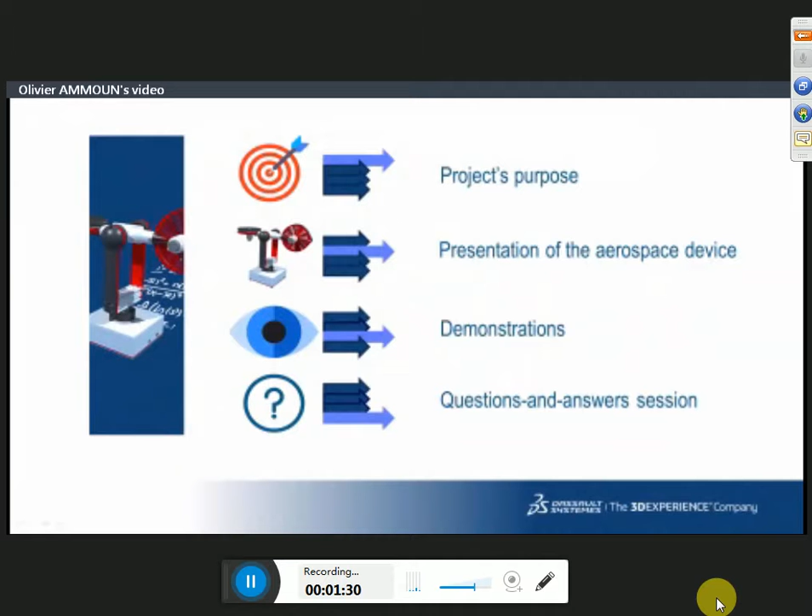So what exactly is this collaboration? The two companies wanted to collaborate in order to enrich the pedagogical experience initially developed by Quanser, the educative aerospace device, also called Quanser Aero. The aim was to use the Dassault Systèmes 3DEXPERIENCE platform to create a virtual twin of the real device, a kind of virtual helicopter whose behavior will be identical or almost identical to the real aerospace device.

So what we did is that we created a 3D model of the aerospace device, but it's not simply a 3D model. We implemented multiphysics behavior to the 3D structure, which allows it to move and behave exactly like the real aerospace device. We are able to control the virtual twin almost exactly like the real device. For example, we can give a target angle for the pitch and the yaw axis of the virtual helicopter, and we will see how the virtual twin will dynamically try to reach the position.

At any time, we can connect the real device to the 3DEXPERIENCE platform and see that the behavior of the real device is really similar to the one predicted by the virtual twin. So what exactly was the purpose of the collaboration? Well, the main goal was to extend the utilization of the real device.

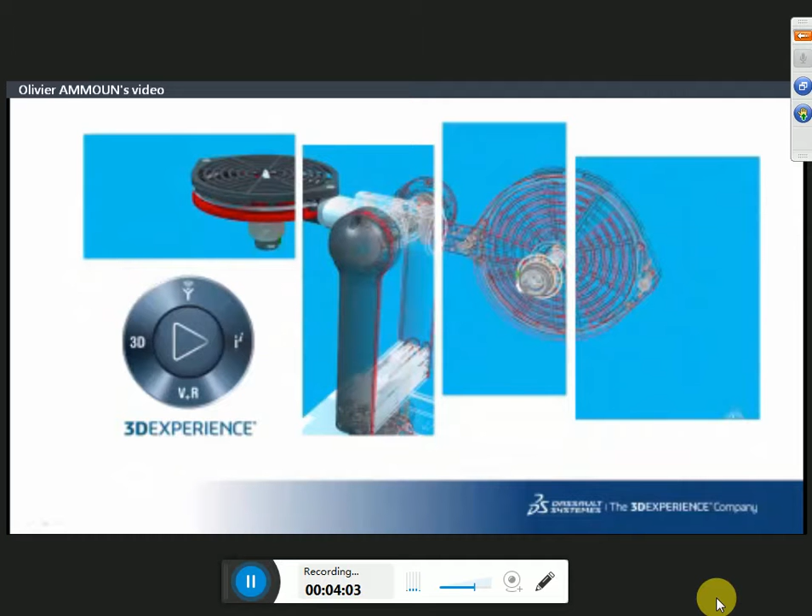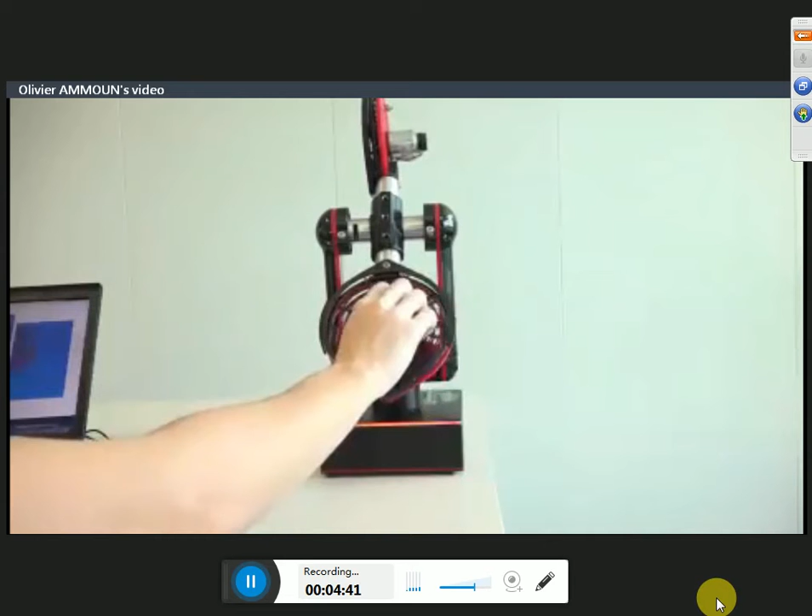So this is the Quanser I was talking about, which looks like a helicopter with 2 degrees of freedom. It can move along this axis, the pitch axis, and this axis, the yaw axis. About its composition, it has 2 rotors, one main rotor here, which allows to control the pitch, and one tail rotor here, which allows to control the yaw. It has blades here, which are 3D printed and shipped by Quanser, but it's possible to print them yourself if you want.

About the rotors, we have one DC motor here and one DC motor there. We have sensors on the Quanser Aero: one encoder here and one encoder there, which allow to know the position of the DC motor shaft and therefore of the blade propellers. We have one encoder here and one encoder there, which allow to know the pitch angle and the yaw angle. And we also have sensors which allow to know the speed of the blades and the intensity of the current within the motor.

About what we can do, it's apply a voltage on the two motors, and you can apply a voltage from minus 18 volts to plus 18 volts. About the data acquisition system, it's integrally built in within the helicopter. We have here a USB interface. So the only thing you have to do is plug a USB cable from the Quanser Aero to your laptop, install some drivers, and the Quanser Aero is ready to be used.

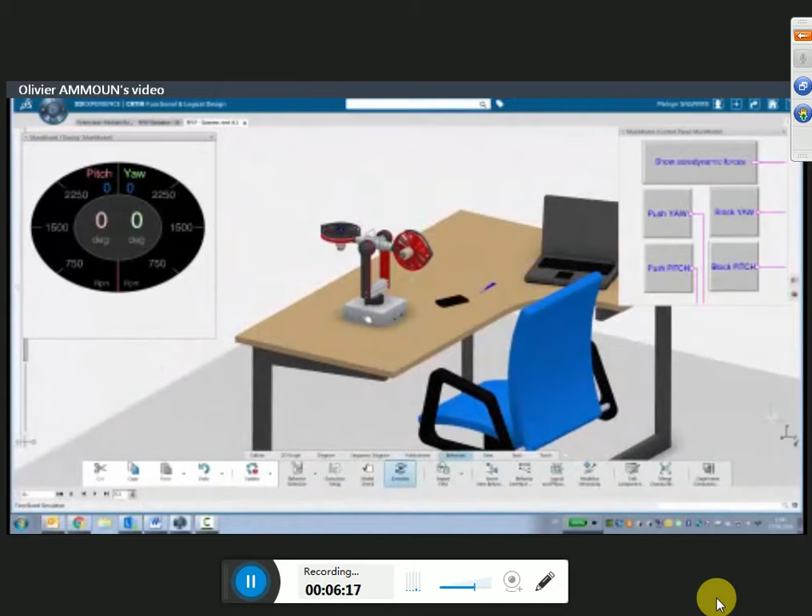So now that I have presented the real helicopter, the real aerospace device, which is next to me on the table, well, this is its virtual twin, which is also on the table near to a laptop and a chair. And here, this virtual twin of the real helicopter is a 3D structure which looks like the real helicopter, but more than being a 3D structure, it has all the multiphysics behaviors associated to the helicopter. So it's possible to control the virtual twin exactly like the real helicopter.

So how is this done? It's done here thanks to the functional logical architecture. Well, I'm not going to go into details, but here you have the order block. Here you have the controlled command block. And here you have the mechanical block. But I'm not going to go into details. I think we're going to see that afterwards.

So as we are in a digital world, in addition to the 3D structure, we can add different elements, such as display, which allows to see the speed of the motors for the two motors, the pitch angle here, the yaw angle here, but also the pitch set value and the yaw set value.

We also have buttons here, which allow to interact during the simulation. So, for example, we can block the axis, block the pitch or block the yaw. We can push the pitch or push the yaw exactly like during the reality, where you want to push the helicopter. We can show the aerodynamic forces. I'm going to go first simulation to show you that.

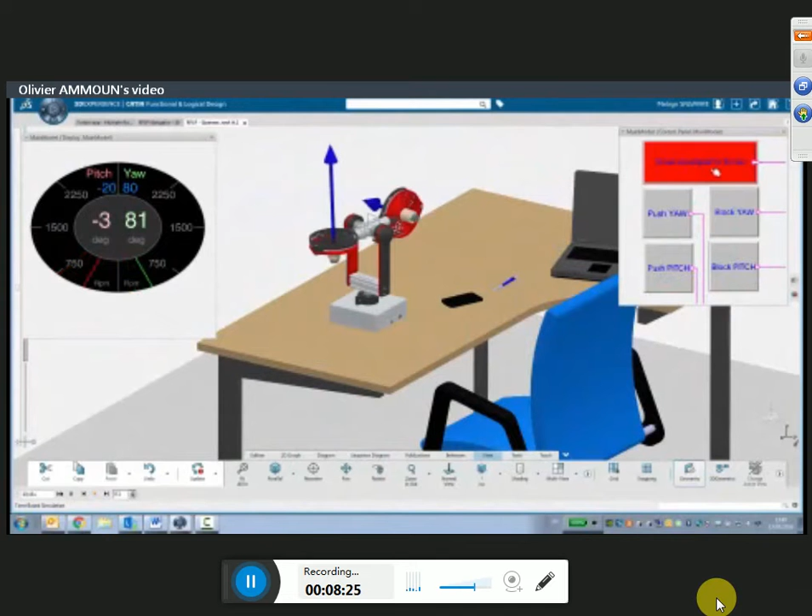So we can see the helicopter move, and I'm going to show you what it's possible to do. Like for example, by displaying the aerodynamical forces. So as you could see, the blue arrows represent the aerodynamical forces of the helicopter. I'm going to play it again so that you can see the forces over there.

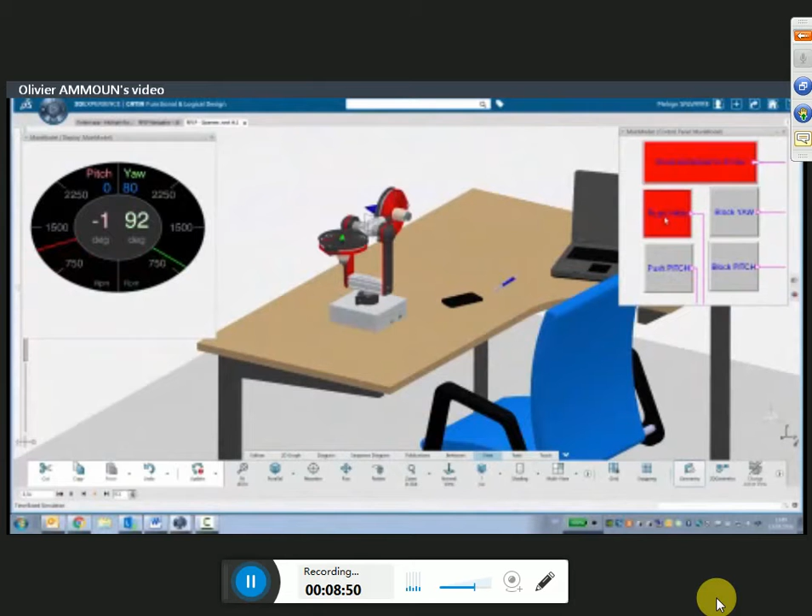So during the simulation, I can also push the yaw. So here I am pushing the yaw, and we can see the blue arrow, which is showing that the helicopter is trying to resist to me pushing the yaw. So in this example, I think I push it with a force of 2 Newton.

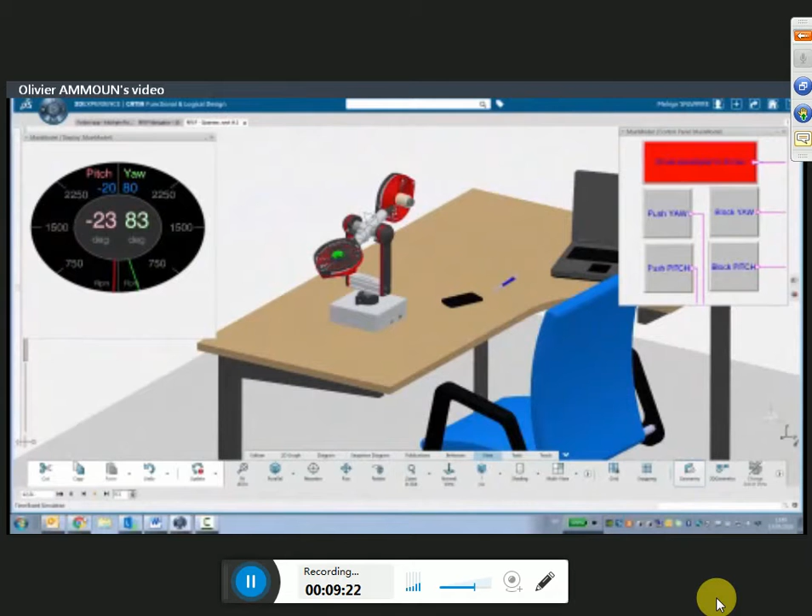I'm doing the same thing here with the pitch. So the helicopter is trying to stabilize. It has some difficulties, but it depends on how the control is done. Here it's with a simple PID, which can be changed by myself or by the students, so it depends how the PID is chosen.

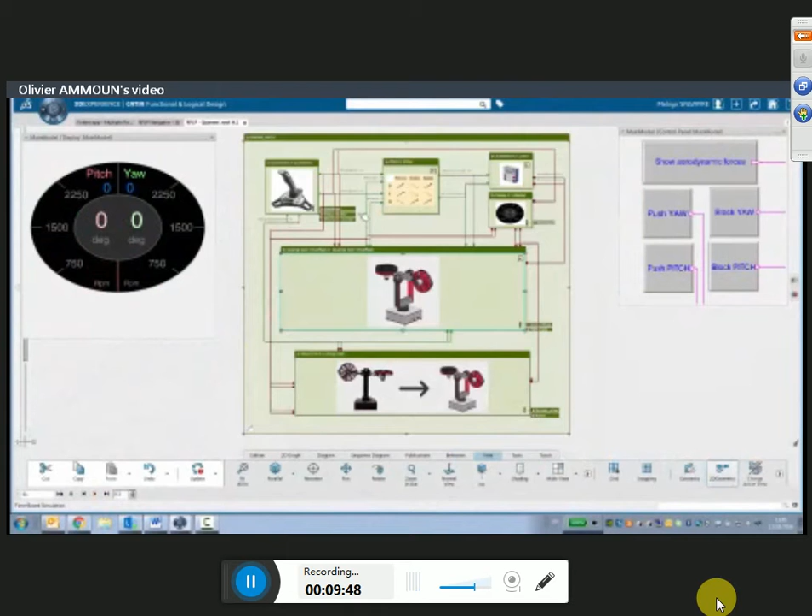To show you another simulation, I'm going to block the yaw right now, and we can see the green arrow here, which is the difference between where the helicopter is and where the helicopter should be. And as I block the axis, you can see that the helicopter cannot reach the position. So as I can block the yaw or block the pitch, we can control the helicopter only on 1 degree of freedom.

So I'm going to show you an example here when we're going to block the yaw. And so I put the 0 set value for the yaw. And for the pitch, I'm going to ask him to go to 0 degrees, then 20 degrees, then 0 degrees, then minus 20 degrees. Gonna go there. And as I said, we're gonna block the yaw.

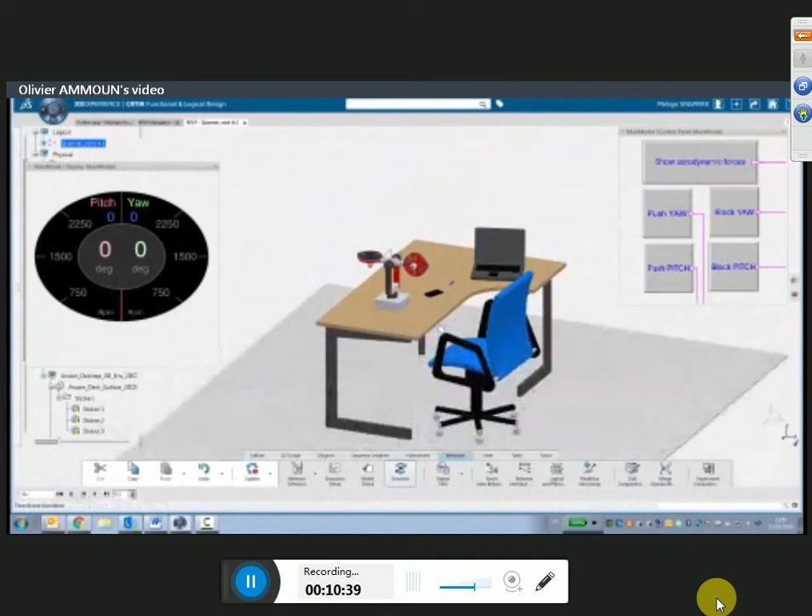So I'm just gonna find the tree there. Simulate. We just have to wait 2 or 3 seconds. We just have to be patient. Okay, there we go. So I'm gonna block the yaw.

And what I also want to show you while the helicopter is starting is that during the simulation, at any time, we can plot some values, some curves. So here, what I can do is I can plot the pitch angle set value, and I can also plot the pitch angle value, and I can see them on the same graph to see how they behave over time.

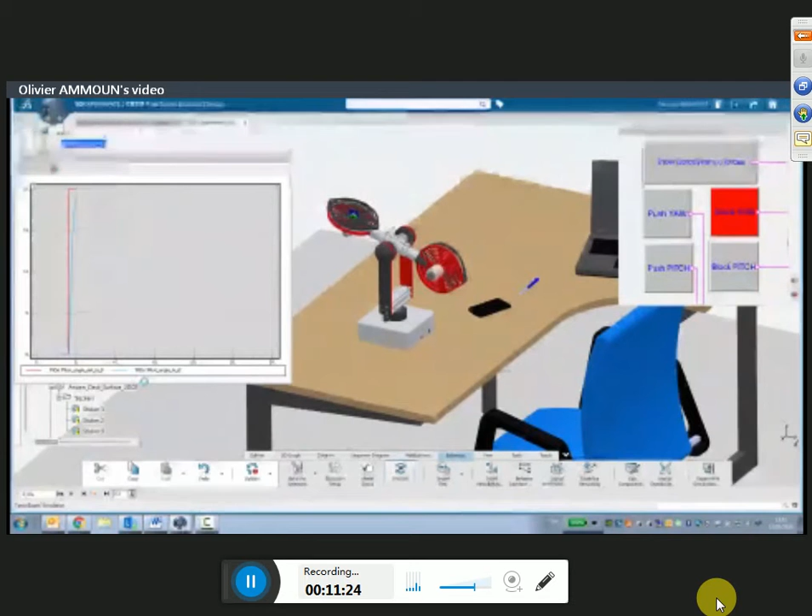So here in red you have the set value, and in blue you have the actual pitch angle. So you can follow the evolution over time of the angle, which is very important if you want to do control. So here the control is done with a PID, and you can change the gains of the PID at any time to see how the parameters of the PID will affect the simulation.

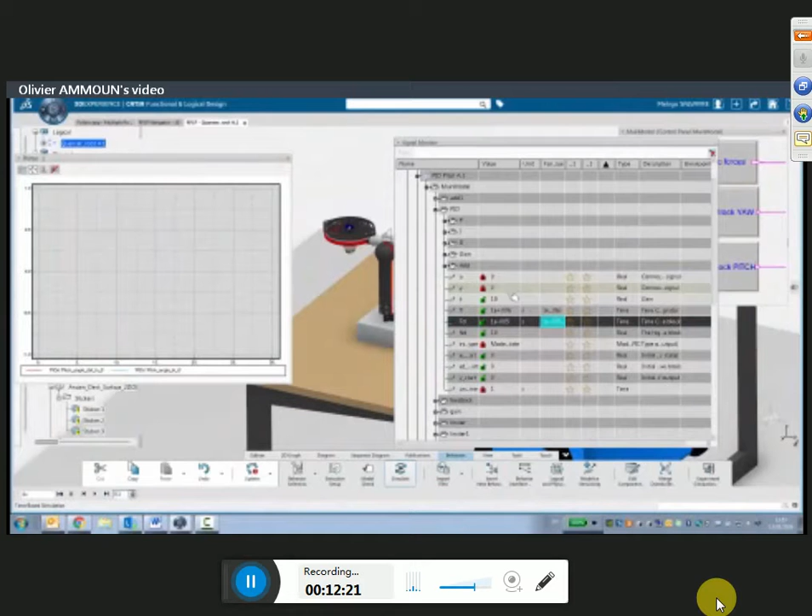So for example, we're going to change the values of the PID of the pitch. So here you have the gains Kp, Ki, and Kd, which are the three gains of a PID. And here I'm just going to choose a P. So I'm going to cancel the I and cancel the D. So here it's like we have only a P corrector with a gain of 15. And you're going to be able to see the difference, the impact of the control on the helicopter, on its behavior.

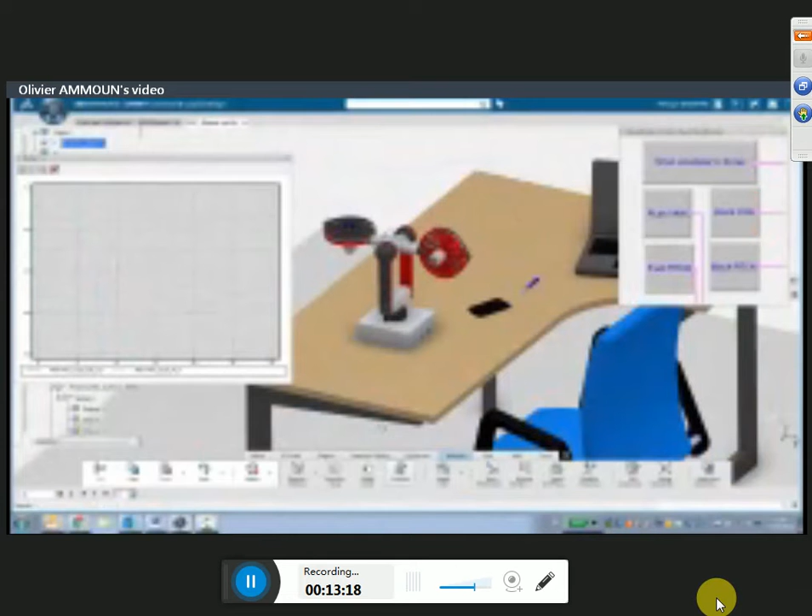Just have to wait a bit. Come on. All right, there we go. Okay, so here you can see it's the typical behavior of a P controller. So you can totally see the difference with the PID. And here the P controller is not well tuned, but just to show you that it is possible really quickly and easily to change the parameters of a controller. Alright. So this is the first example of what it is possible to do.

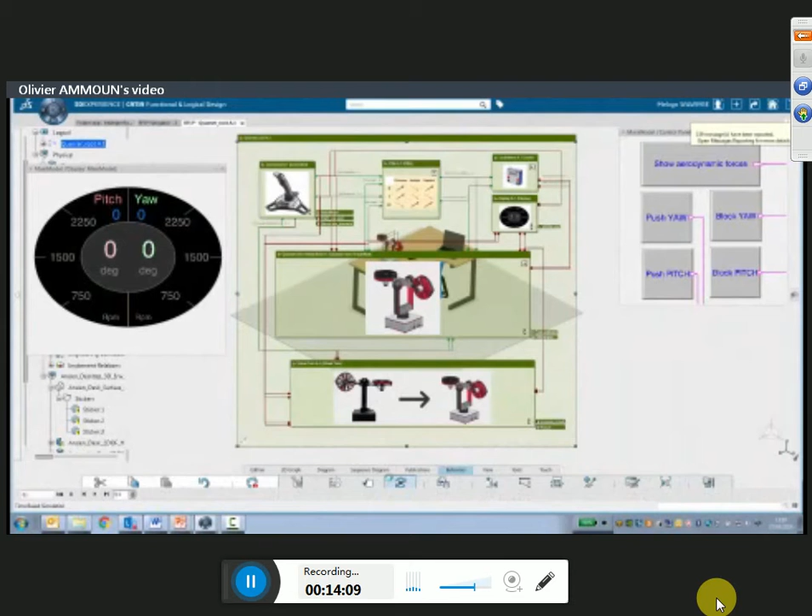And to give you another example, what we can do with the virtual twin is simulate the impact of a design defect. For example, if the main rotor here has an offset angle of 5 or 10 degrees, well, we can simulate that. So how to do that? I just have to change one value of one constant here. I'm going to write 20 degrees, which is the constant defining the offset angle of the pitch rotor. And so after I've done that, I just need to simulate again. There is no calculation to do, no equation to write, just one constant to change, and the model is going to calculate everything for me.

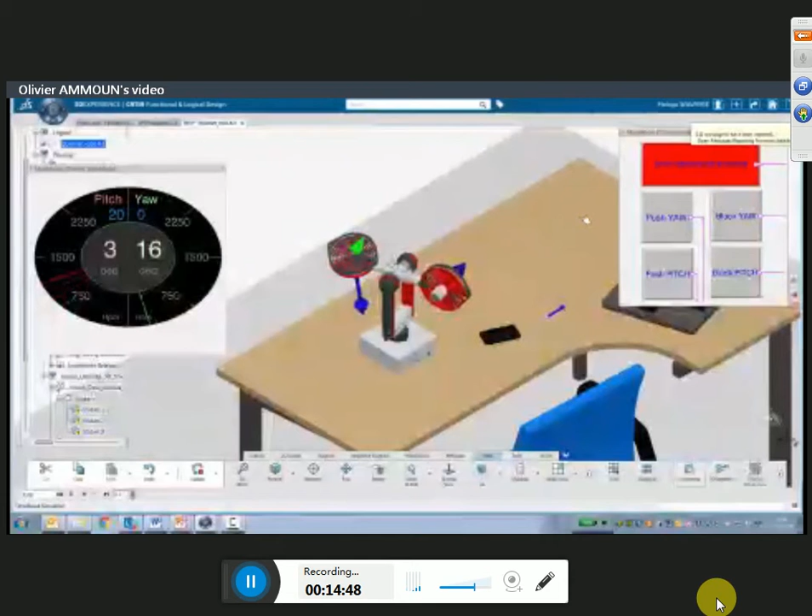So I'm just going to wait 2 seconds, okay. And here you can see the offset angle. Well, I'm going to choose a better view, like this. All right, perfect. And here you can see the 20 degrees offset angle of the rotor. So if I run the simulation and I show you the aerodynamical forces, we're going to see that the helicopter is going to have some difficulties to follow the set values. And we're even going to see the aerodynamical forces, which are not going to be vertical, but shifted with the offset of 20 degrees. And this is why the helicopter has some difficulties to reach the position.

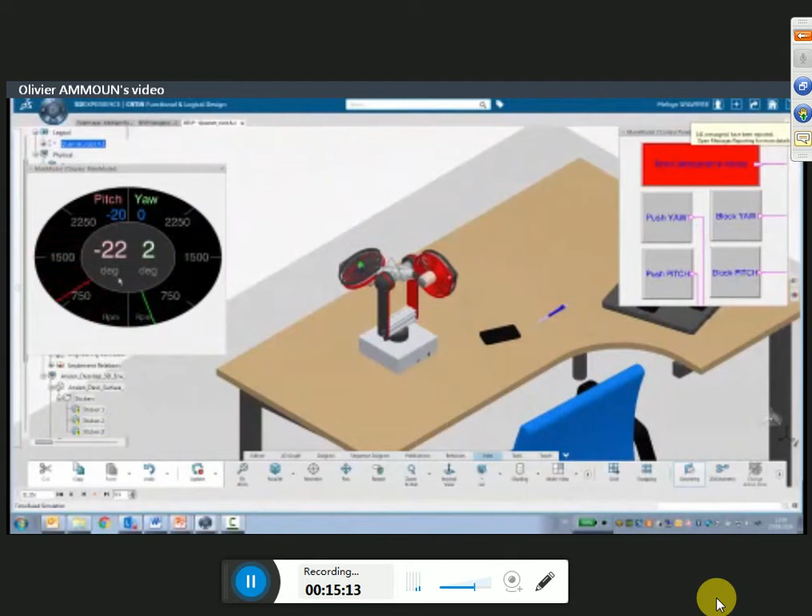We can see here that it has 25 degrees, and on the previous simulation it was easier for the helicopter to reach the 20-degree set value than the 0 or the -20. Okay, so this is how we can simulate a design defect. And what I want to show you right now is that we can validate all those simulations with the real helicopter. And how to do that? Well, we can just connect the real helicopter to our laptop, to the 3DEXPERIENCE platform, and we can realize the exact same simulation, but with the real helicopter. So what we want is the exact same instruction block, the same command block, but we don't want to send the command to the virtual twin, we want to send it to the real helicopter.

So for that, we have to make 3 clicks. So here I have to select the real helicopter and not the virtual one. I have to check that I have the right execution setup parameters. And I'm just going to re-put the first scenario with the yaw going from 0 to 80 degrees over there. Okay, and the only thing that I have to do is to run the simulation here, and thanks to the camera you can see the real helicopter. I press play, and here we have the real helicopter, which is going to have almost the same behavior as the virtual one with the previous simulation. Well, the behavior is not identical, but it's not the goal here.

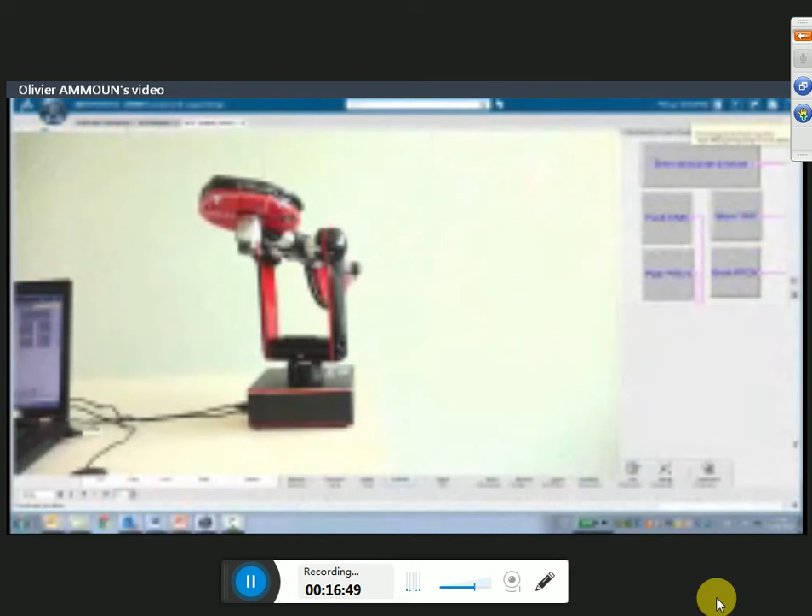The aim of the virtual twin is to predict the behavior of the real helicopter, a realistic behavior, with 10% of error. But the goal is to be as accurate as possible. And so here, at any moment, I can validate what I did virtually. I can add disturbances to the helicopter. So maybe I pushed it a bit too much. Okay, so that's okay. It was because we are at the end of the simulation. I just need to simulate again. There we go. Okay. So I can give disturbances to the helicopter with my finger.

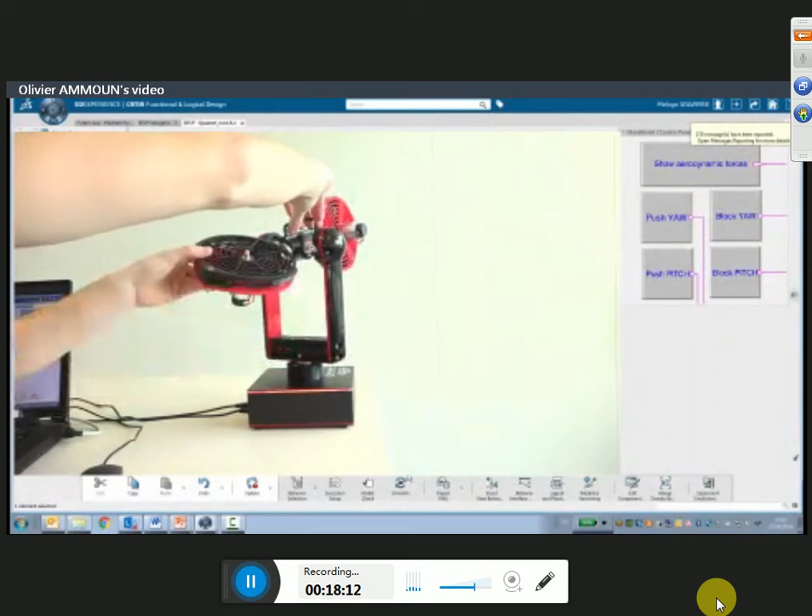And so we can obviously do all the things that we did virtually. We can do them in reality. I can also block the axis with the Allen key, which is there to block the yaw, or I can block the pitch with the screw which is over there. And what I want to show you is that we can also give an offset angle to the rotors. So with the Allen key over there, we can loosen the screws and give an angle of 20 degrees to the rotor. And so I can resimulate with the offset angle.

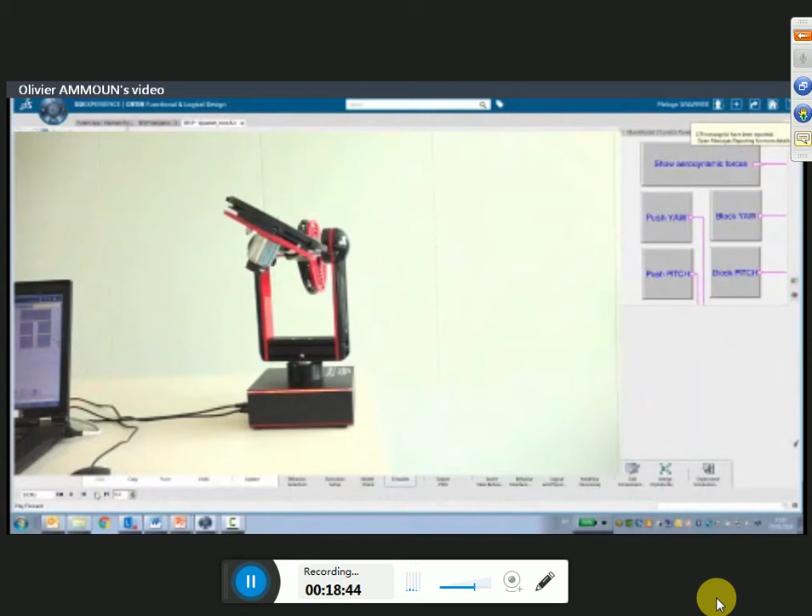Okay. So we have the exact same simulation, but with the rotor shifted of 20 degrees. So the helicopter doesn't have that much issues to reach the position, but is a bit less accurate to reach the 20 degrees, then the 0 degrees, then the -20 degrees position.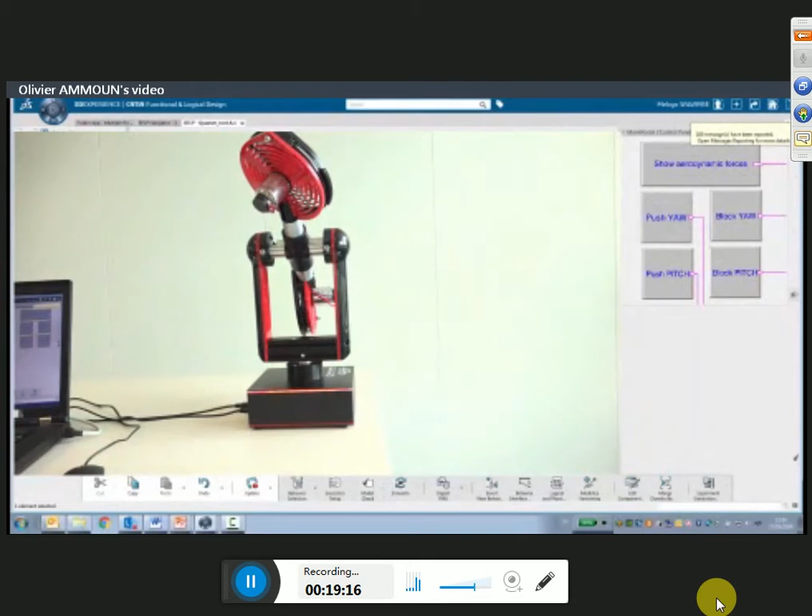So this was to show you the duality virtual helicopter, real helicopter, which allows to validate in the reality what I did virtually. And now what I want to show you with the time left is something different, which is possible to do with the virtual twin, and that we call the instrumentalized virtual twin. So what is the instrumentalized virtual twin? So it's a virtual twin which is gonna be displayed when we control the real helicopter.

Previously, when I was controlling the real helicopter, you didn't see anything on the 3D structure, on the 3D platform. What I want to see right now is when I control the real helicopter, I want to see the virtual one, which follows and replicates the behavior of the real helicopter. And as it is virtual and numerical, I can add a lot of information on the virtual twin to have more information than what I see on the real helicopter.

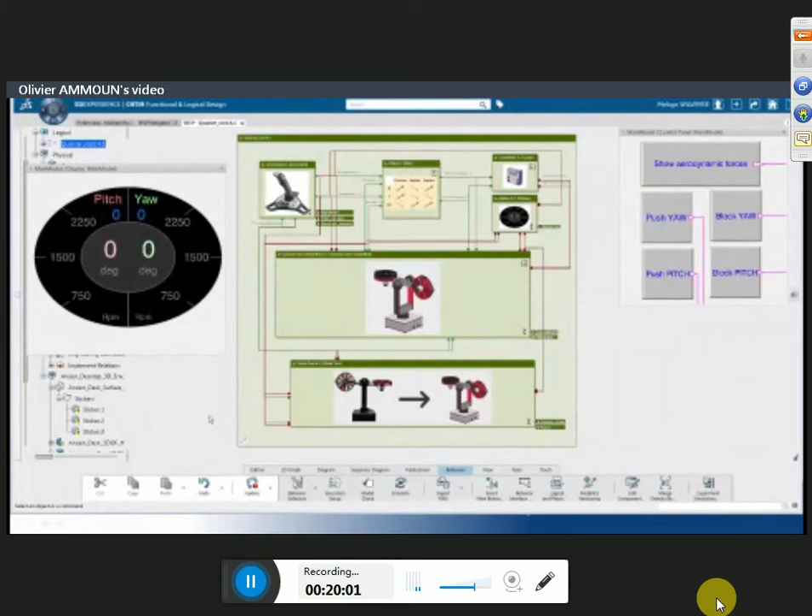I can have arrows, I can have pieces which change of colors depending on the temperature, the speeds. So it's like if we have more sensors, more information, and that's why we call it an instrumentalized virtual twin. It allows to see more things than only with your eyes watching the real helicopter. So you will understand better with the simulation.

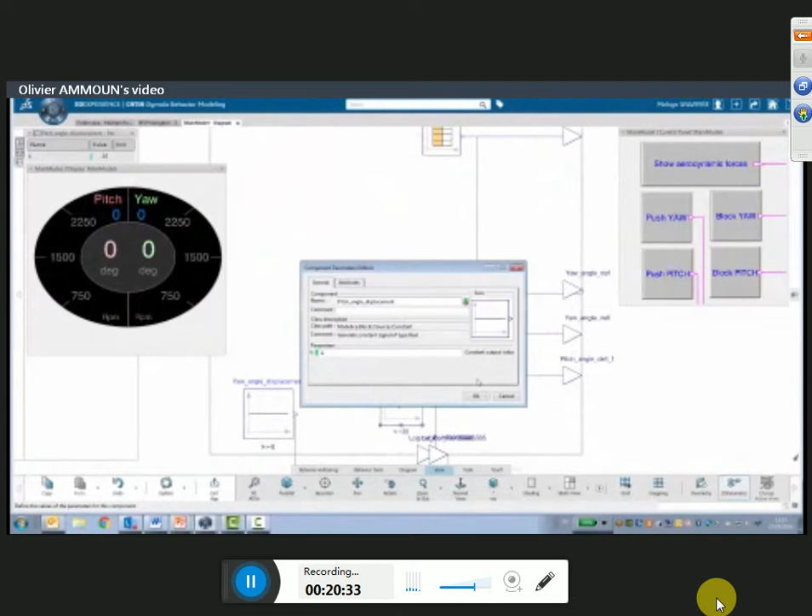So we keep the control on the real helicopter. We just add the virtual twin up, and I just need to remember to remove the 20 degrees of the rotor offset angle. And the only thing that I need is to simulate once again. Have to wait a few seconds. Okay.

Alright. So we have the virtual helicopter and the real helicopter at the same time over there. And I'm only controlling the real helicopter. So if I play, all right. So we have the real helicopter on the right, which is being controlled by the 3D Experience platform.

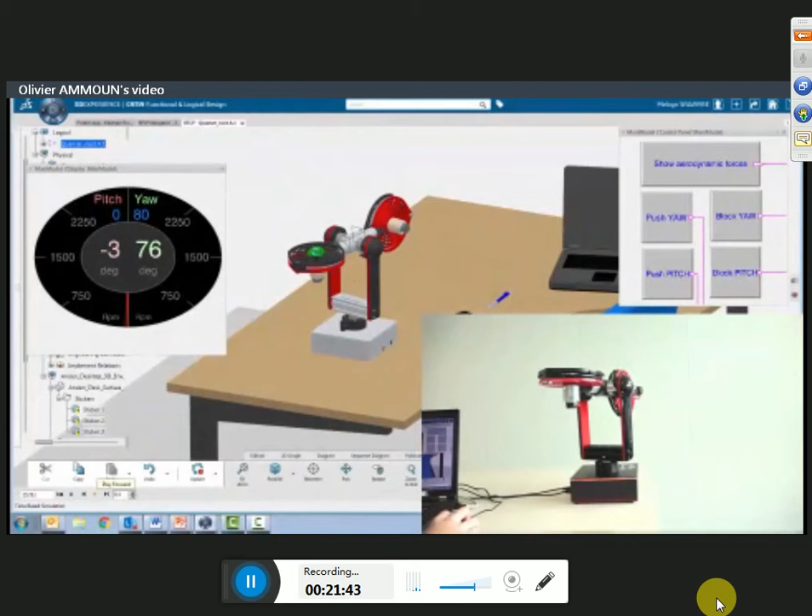But at the same time, I have the virtual helicopter, which is following the helicopter, and which allows to display more information, such as the display over there, which allows to know the exact angle of the pitch and the exact angle of the yaw, because it's difficult to see it with your eyes. And we have the green arrow over there, which is the difference between what a helicopter is and what a helicopter should be.

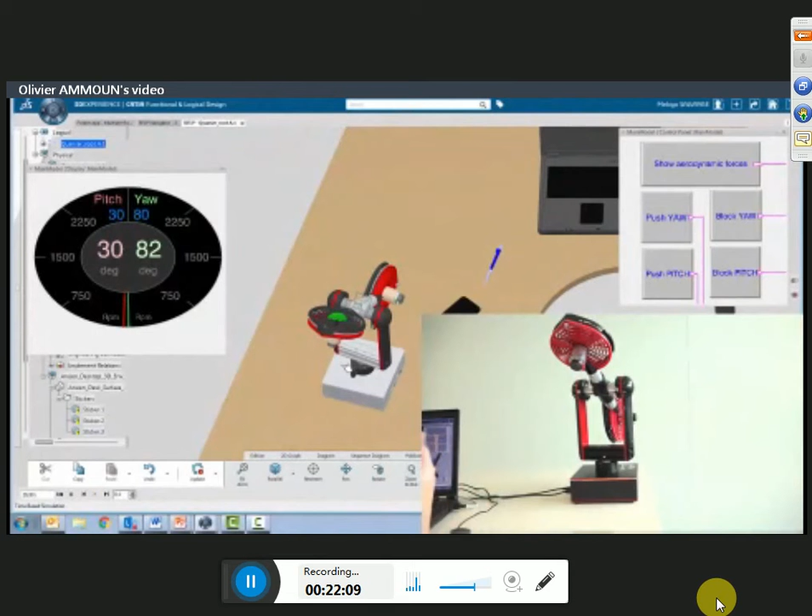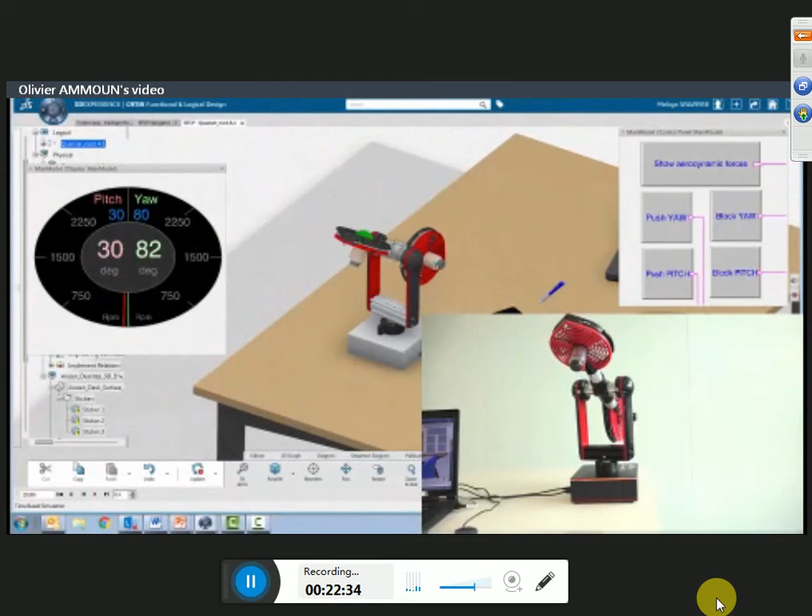We can also have the blades, which can change colors depending on the speed. I can make them become green or purple or whatever I want when the speed reaches, for example, 2000 RPM, revolutions per minute. So with the second part of the virtual twin, the instrumentalized virtual twin, we can have more sensors than what it's possible to have on the real helicopter. We can simulate and model new sensors or the same sensors, which give more information and illustrate the information better.

So now we're done with the demonstration part. I hope that you understood the amazing possibilities given by the virtual twin and by the real device. Now I just want to spend a few minutes on the lectures and the hands-on that we developed here in Dassault Systèmes. Those lectures are completely free and they are available on the website of Dassault Systèmes.

So the first lecture is about systems engineering process. It's a really quick lecture where students can understand what is a systems engineering process and they can apply this process on the Quanser Aero and its virtual twin. So basically we go down the V cycle, but every time we give an example with the Quanser Aero and with the virtual twin. About the hands-on, we developed 4 hands-on.

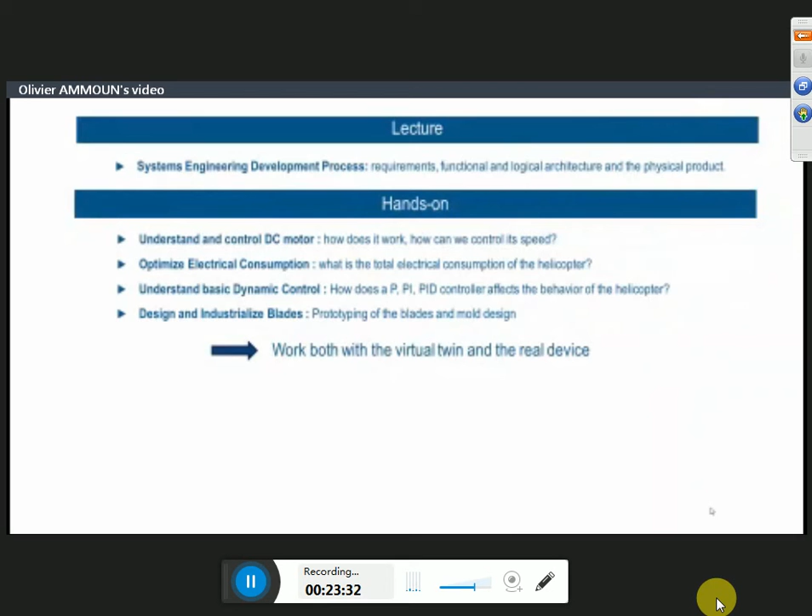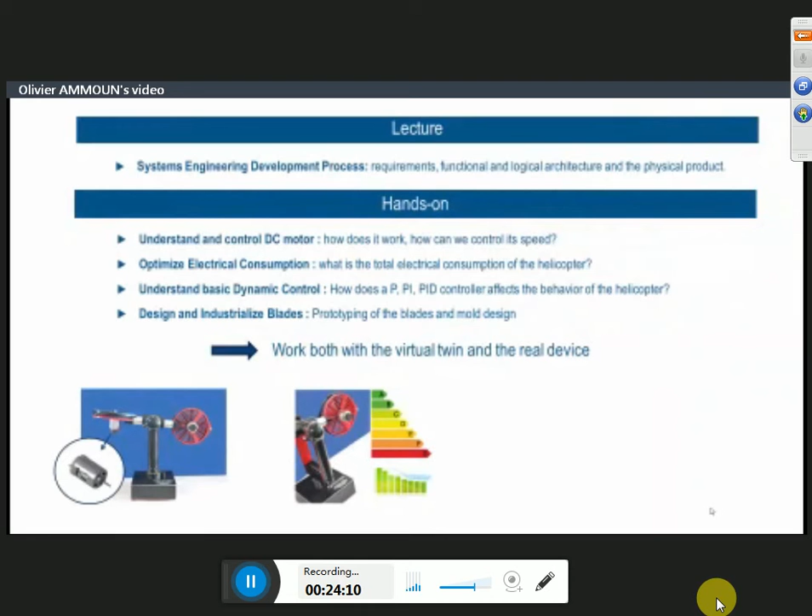The first one is about DC motor, where students can understand how does a motor work, how can we model this motor, and how can we control its speed with a really easy example. The second hands-on is about the electrical consumption, where the students are going to measure the electrical consumption of the real device, but also of the virtual twin. They're going to compare the results, and they're also going to play with some parameters of the helicopter to try and see which parameters have an influence on the electrical consumption.

The third lecture is about control and dynamic control, where students are going to understand how a PI or a PID controller affects the behavior of the helicopter. On this lecture, the exercise is a bit like the one I showed you before. We're going to block the yaw axis. We're going to give an instruction to the pitch axis. Here it has to go to plus 10 degrees, then minus 10 degrees, then plus 20 degrees. And we're going to see how a PI or PID controller tries to make the helicopter reach this position.

Finally, the last lecture is about the design and the industrialization of the blades. As I told you in the very beginning of the webinar, Quanser ships the Quanser Aero with 3D printed blades, but it's also possible to print our own blades. And on this lecture, the student is going to start by prototyping a blade that is different from the first one, and is going to go from the prototyping to the industrialization with the design of a mold at the end.

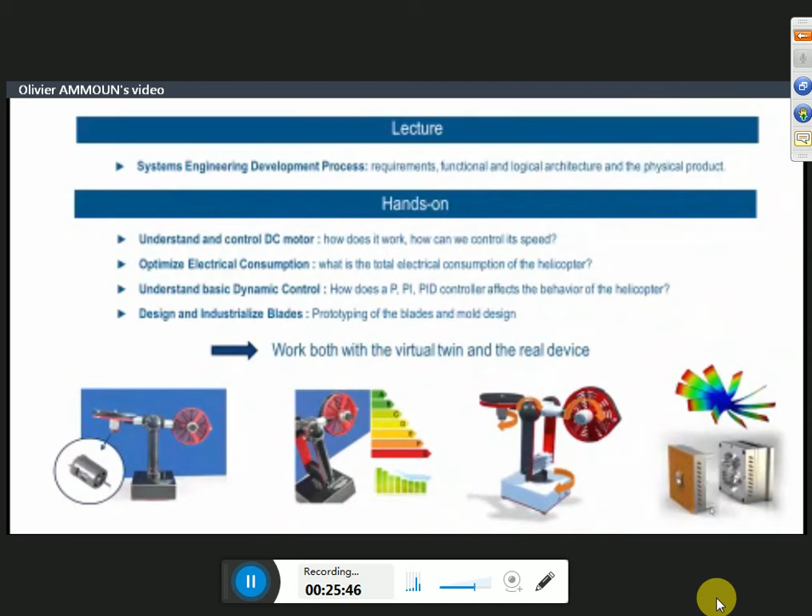Okay, so the first question that we have is from Joris, who is asking where the lectures will be available. So after the webinar, in 24 hours, you will receive an email with a web link. You can click on the link, and it will go directly to the 3DS Academy website. And in the website, you can find all the lectures that I just presented. For the moment, we just have the catalog courseware of the lectures, but next week, all the materials will be there. So the lectures, the hands-on, everything you need to run the lectures on your laptop.